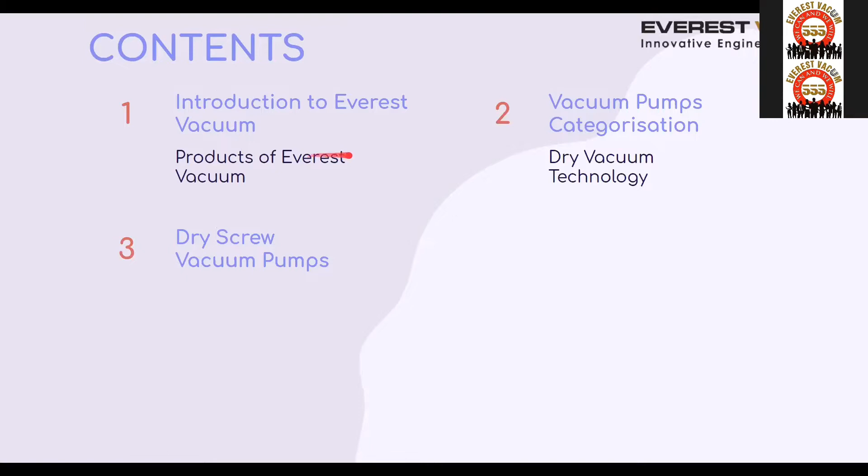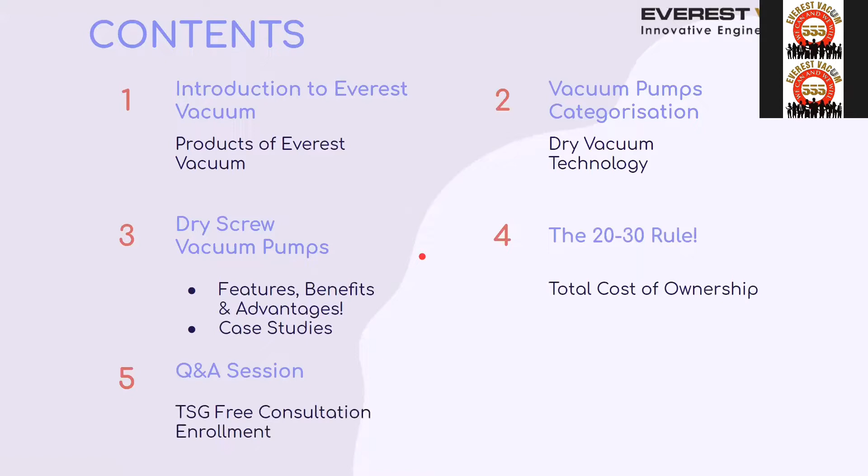Here we are today for the webinar on our vacuum product, dry screw vacuum pumping systems. Our content covers introduction to vacuum systems, our products, vacuum pump categorization, dry screw technology, dry screw vacuum pumps, their features, benefits and advantages, along with some case studies. We'll cover the 20-30 rule and total cost of ownership, and at last we will attend a question and answer round.

Everest Vacuum is a 14-year young company of Everest Group, which was started with the objective of providing turnkey solutions for the vacuum industry. Our parent company was in manufacturing of blowers and mechanical vacuum boosters for our customers. During this course, we realized that the products supplied by other companies were not meant for the vacuum system in terms of sizing and customer requirements. Customers were typically purchasing vacuum pumps and boosters from different companies, and they were facing jamming issues, sizing issues, and condensate carryover. That's why we entered this vertical of vacuum business.

This is when the management of Everest decided to work in a structured way and provide comprehensive solutions on a turnkey basis to our customers. We studied our customers' requirements and, with our three decades of experience, successfully engineered most of the products for the vacuum industry.

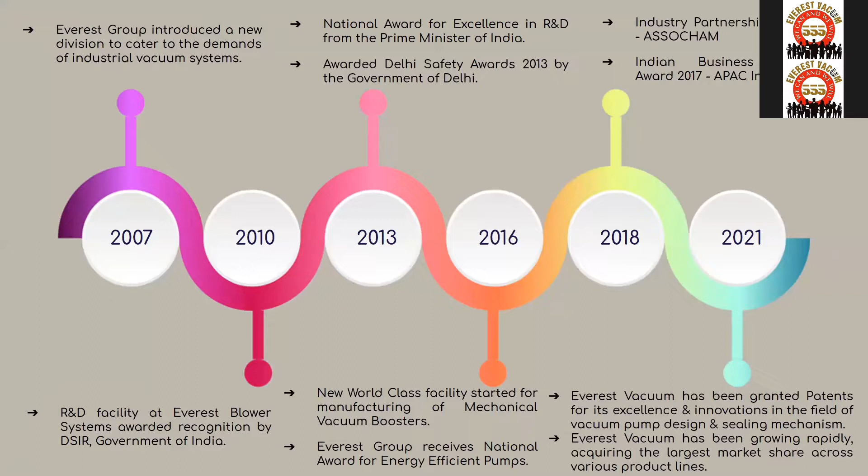We started our vacuum journey in 2007. After that, we started an R&D facility which is DSIR approved by the Government of India in 2010. In 2013, we received the award for R&D from the Prime Minister, and after that we started manufacturing vacuum boosters with a world-class facility. We were also awarded with ASSOCHAM and Indian Business Excellence Award 2017. At Everest, we are growing rapidly and have the largest market share across various vacuum products.

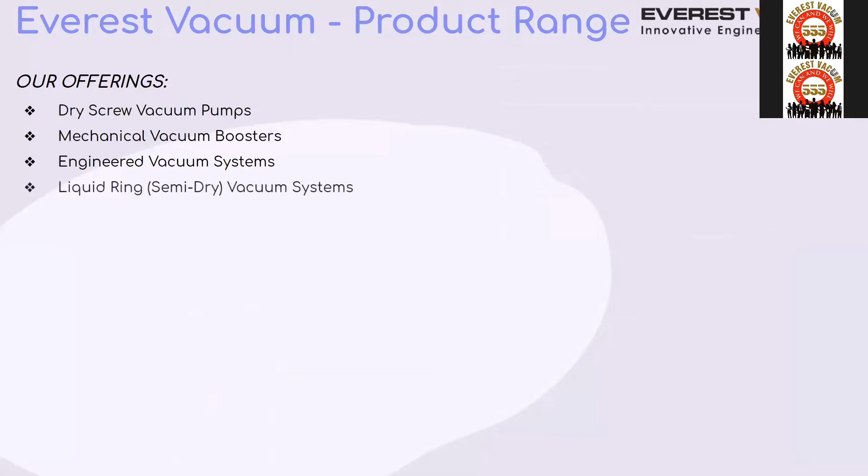Here is our product range - what are our offerings? We offer dry screw vacuum pumps, mechanical vacuum boosters, and engineered vacuum systems. We also offer liquid ring vacuum systems, oil ring vacuum systems, and rotary vane vacuum systems. This is our latest innovation, a low temperature thermal evaporator, meant for zero liquid discharge.

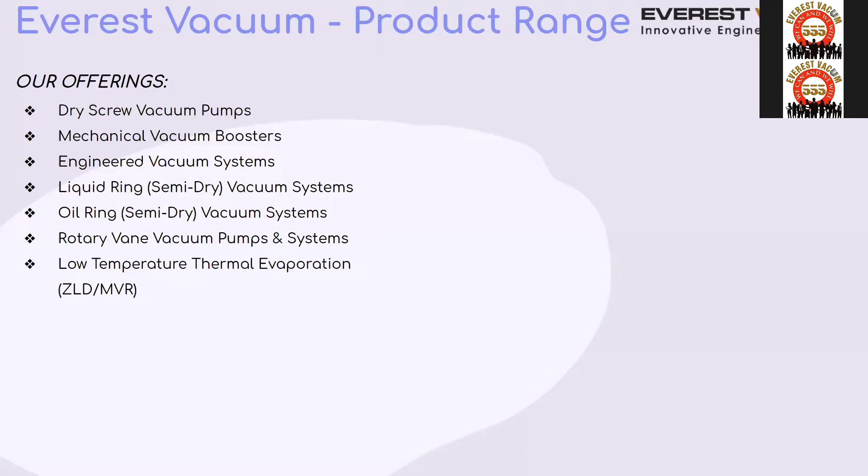What are our promises? We promise our customers clean, reliable and sustainable vacuum, improved product yield, deeper and consistent vacuum, cost and space saving by right sizing, reduced batch cycle times, and reduced operational cost.

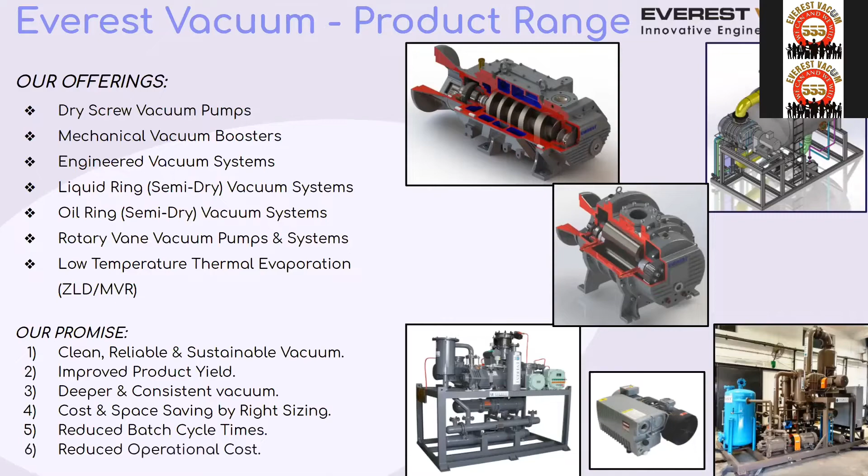Vacuum pumps are categorized into two stages. We will discuss positive displacement and rotary systems, and in rotary systems there are two technologies: wet technology and dry technology. We will discuss dry technology, the dry screw vacuum system, and we will also take wet technology as a base.

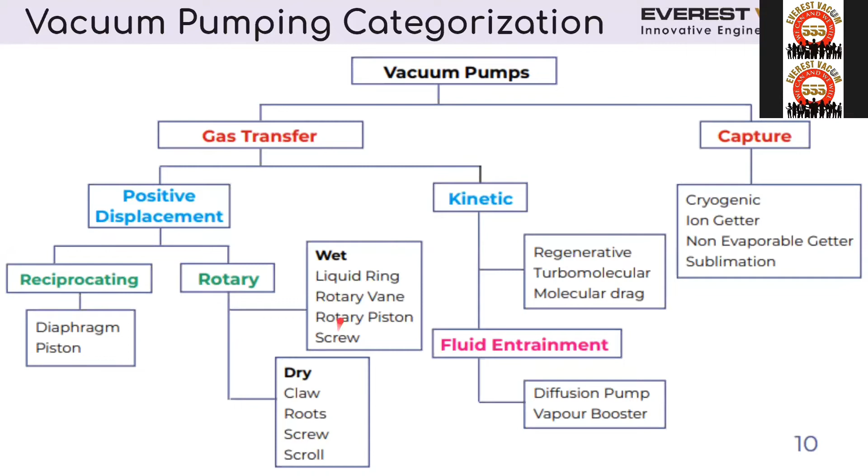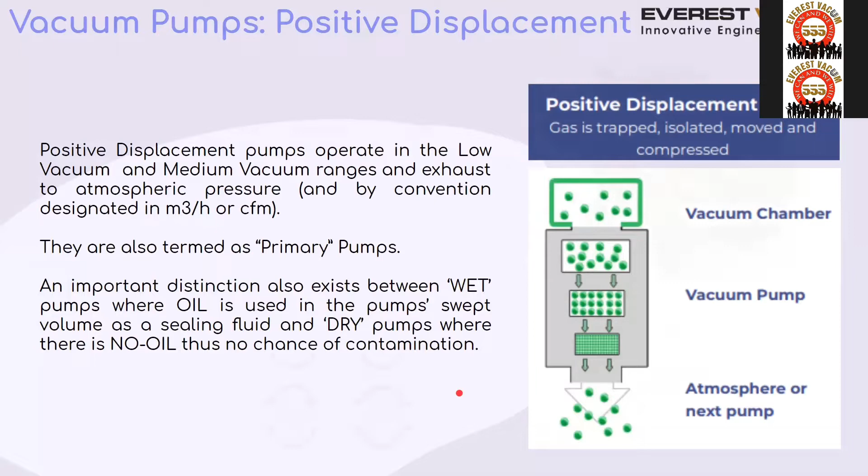Now, the mechanical vacuum booster. The mechanical vacuum booster, commonly known as booster, boosts the pumping capacity of the vacuum system and also enhances the vacuum of the backup pump. This is a twin lobe structure with up-down discharge, which supports the gravity.

The advantage of the vacuum booster is that it's 100% dry, quiet and compact. It has a very long life, provides clean pumping, has high pumping speed, power saving, and is cost effective.

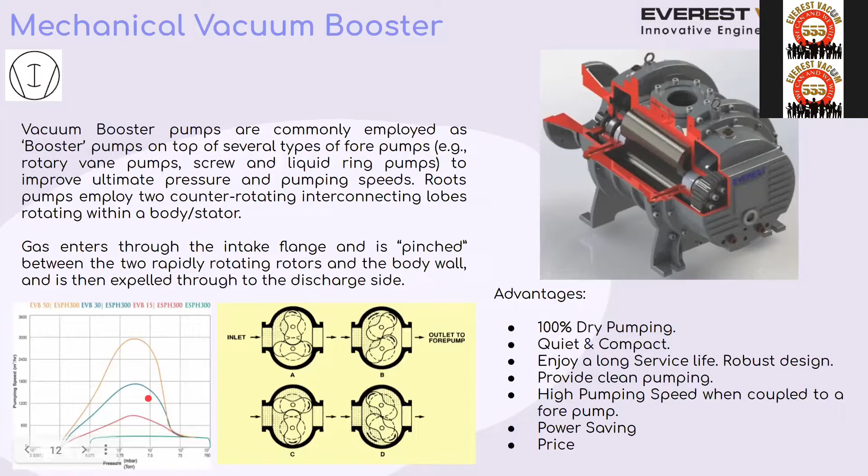When you operate only with the pump, you get consistent vacuum but with low capacity. But if you introduce the vacuum booster above the vacuum pump, then you get higher capacity with higher vacuum.

Here, dry screw vacuum pump. Dry screw vacuum pump operates using two counter-rotating rotors. It rotates opposite in direction.

This rotor traps gas between the pockets. These are the 5 pockets where the gas are trapped, and this is compressed in 5 pockets, and the screw have numerous important facets. Despite the micro space between the two rotating screws, there is no contact part involved there, so there is no need of lubrication.

As a result, there is no contamination of the medium being pumped. Furthermore, rotary wear is very minimal, and they provide you higher efficiency due to internal compression, and operational cost and maintenance requirement of these type of pumps is very low.

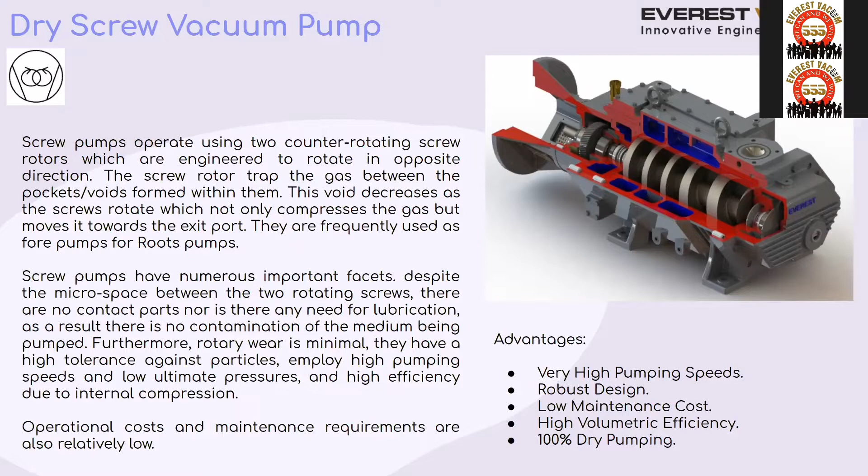Now, advantages of the vacuum pump. Dry screw vacuum pump gives you very high speed of pumping. It is robust design, requires low maintenance cost. It has high volumetric efficiency, and this is 100% dry pumping. There is no lubrication involved in the media of your product.

Now, the super screw RR model for the dry screw vacuum pumps. This is the newly developed vacuum pump technology. We offer the vacuum pumps from 150 meter cube to 1500 meter cube, and we provide the systems from 150 meter cube to 18,000 meter cube.

As these pumps are completely dry, your process vapor does not contaminate with any material, and you get clean pumping. The pumps are in line with technology available so the customer should get high volumetric efficiency with low power consumption. These pumps are operated with VFD, so you can get a reduced power of 30% saving.

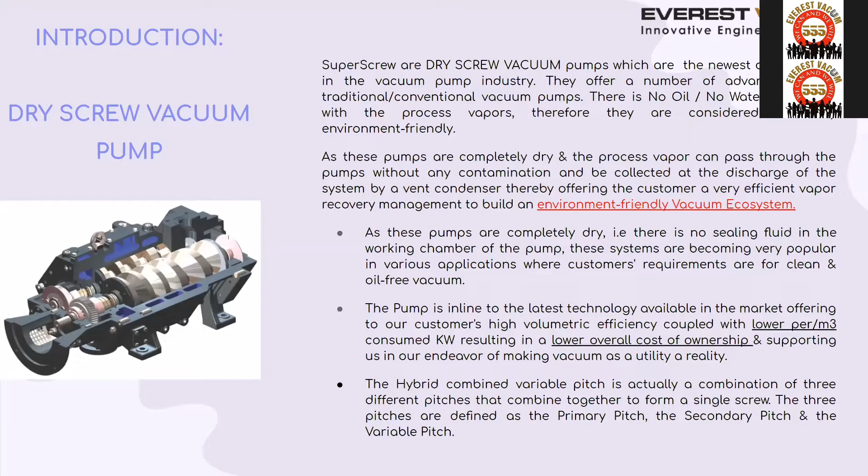Now we come to our anti-corrosive dry screw vacuum pump range. Here we provide a special coating, that is nickel plus PEEK. This is the diagram of the cut section of the dry screw vacuum pump.

Here number 1, you see the suction. Here the customer vapors come in, and this is the 5 pockets where the vapor is compressed. Number 2, this is the discharge portion. Number 3, this is the screw.

This screw is coated with nickel. This screw can be coated with nickel PEEK as per the requirement of the customer. Number 4 here, this is the seal. We provide the mechanical seal, and here there are the bearings, and here are the timing gears and shaft and coupling, and this is the cooling jacket to cool the pump.

We provide ENP coating on alloy cast iron casing. We provide ENP coating on alloy ductile iron screws. We also provide Hastelloy mechanical seal Kalrez O-rings. We provide PTFE double lip seal. We provide synthetic lubrication oil for the bearing lubrication purpose. We provide N2 inlet and seal purge.

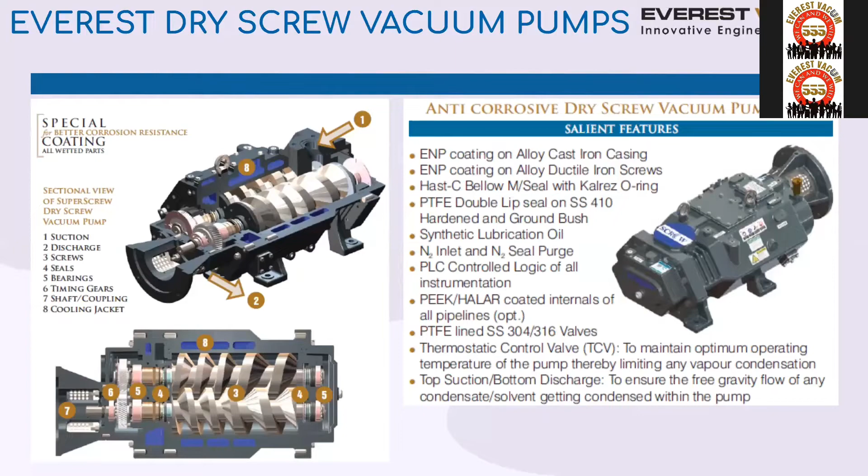These are our offerings in the dry screw. We give PEEK coating for standard, non-corrosive applications. We provide our CX pumps, anti-corrosive pumps for corrosive vapors, and we provide clean pumps without mechanical seal where we have to suck only air and clean vapors.

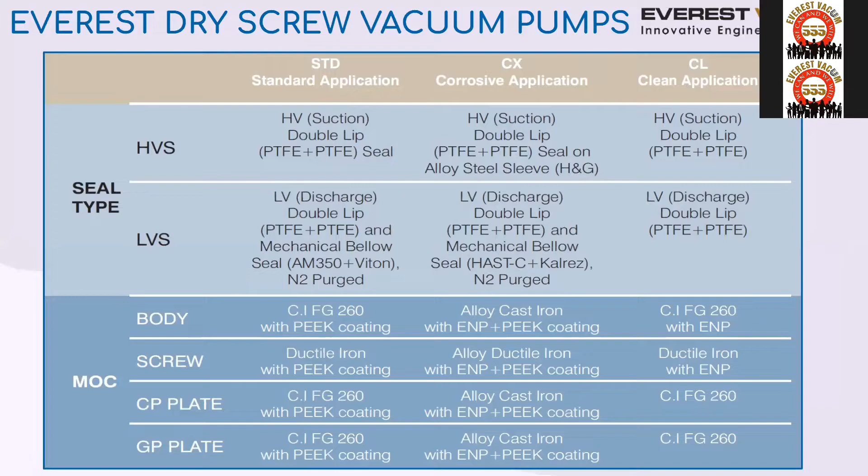This is the performance of the last 10 years, how this industry evolved. Actually, dry screw vacuum pump previously 300 meter cube came with a 15 HP motor, and there was PTFE coating and PFA coating. After the experience, we got the PEEK coating, which is vibrant.

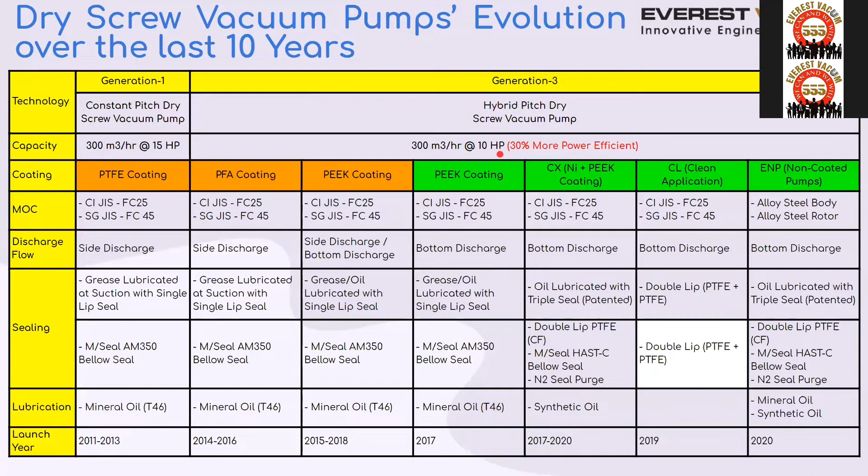And we are now offering our CX pump, clean pump, and ENP, that is our new invention, non-coated pumps. We got the power efficiency award because we have reduced the power almost 33%. By now we are giving 300 meter cube per hour pump with a 10 HP motor.

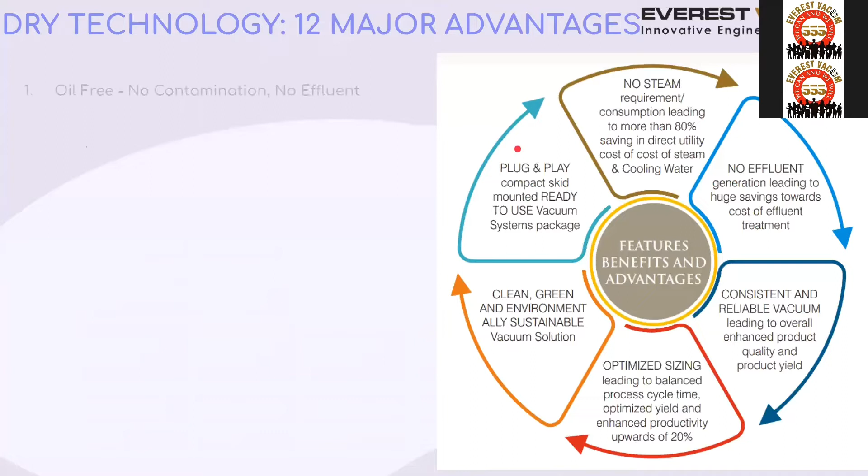Why to switch to the dry screw technology? Here in dry screw technology, this is oil free. There is no oil in the media, no contamination, no effluent generation, no contact operation, so no wear. For solvent recovery, we can introduce a condenser at the post of the vacuum pump so that we can get solvent recovery also, that leads to generate revenue.

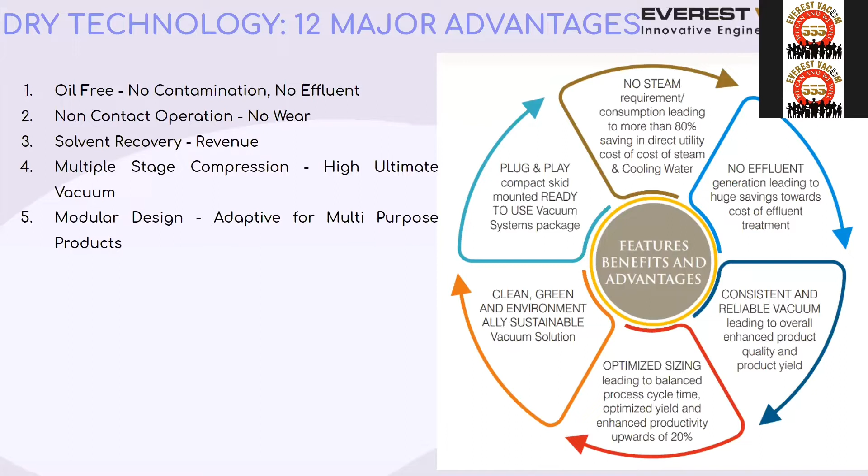Multiple stage compression, high ultimate vacuum. Modular design, so it can be adapted for multi-purpose product. Compact design, less space required. Liquid compatibility is very

versatile, meaning it can handle various vapors. Low vibration and noise, no foundation and enclosure required. This is a wide operation range, so one pump system can handle most of the range of the product. This is a proven technology, so no risk. And this is high efficiency, low operating expenses, and easy maintenance, so it leads to low cost of ownership.

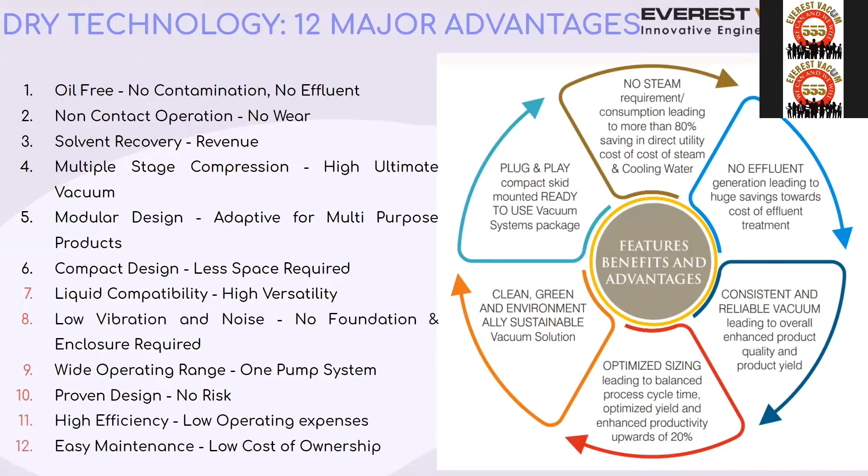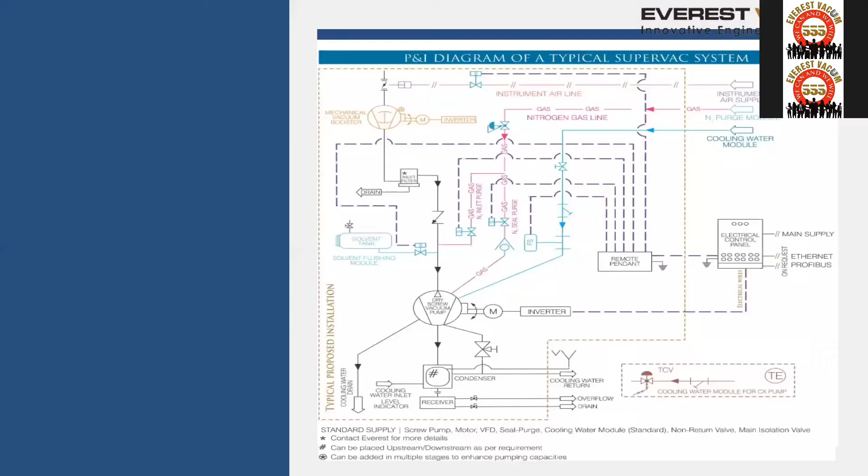This is the typical P&I diagram of a vacuum pumping system. This is the dry vacuum pump, and this is the uppermost mechanical vacuum booster. Here in between, a filter is incorporated if required, and this is the post condenser at the discharge with the receiver, so that we can get the recovery. These are the gas purging line, and this is the cooling water line.

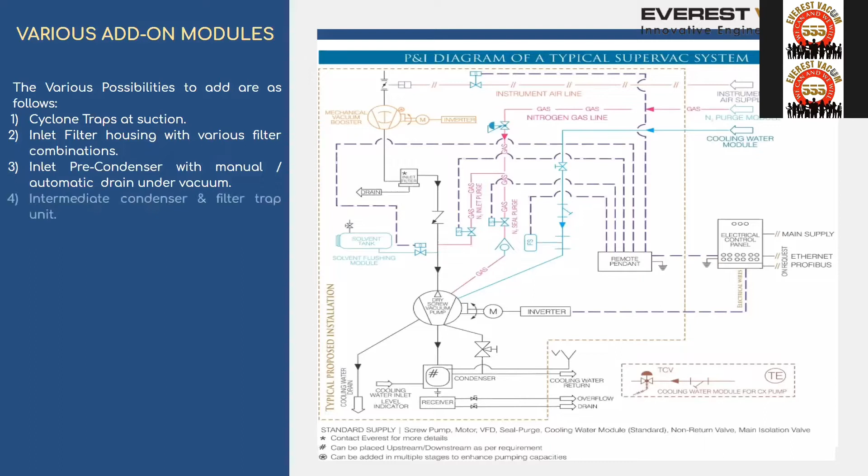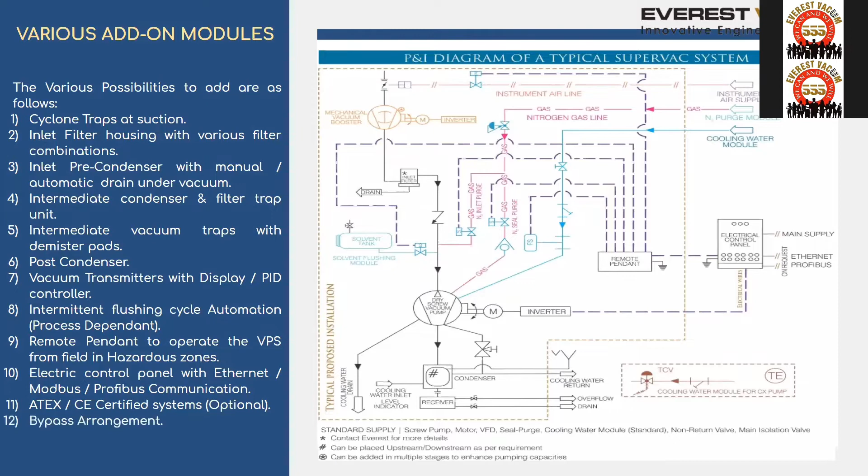Now we talk about what we are giving as add-ons on this vacuum system. We can provide cyclone traps at the suction with the customer requirement. We can provide inlet filters. We can provide pre-condensers and post-condensers. We can provide vacuum transmitter and PID controller. We are providing intermittent flushing for the automatic flushing. We give the remote pendant electric control panel that can be connected through Ethernet, Modbus or Profibus communication. This is the ATEX or CE certified system, and we give the bypass arrangement also to bypass the booster.

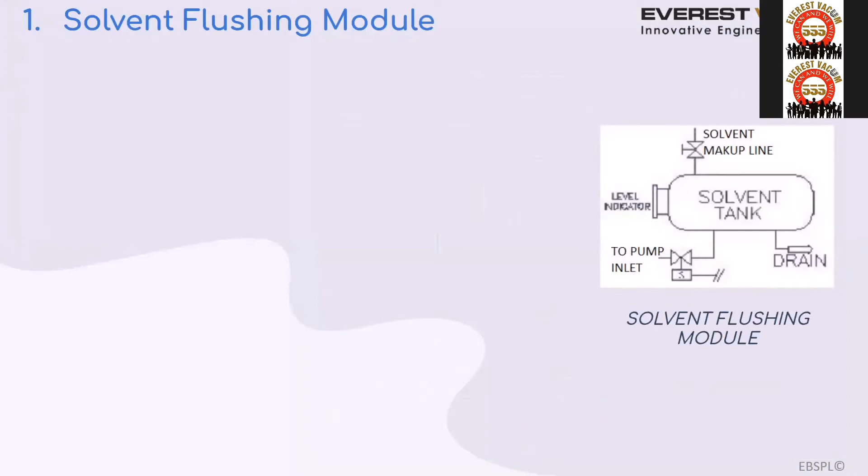Now, this is the solvent tank module. Here, solvent tank module is very important because solvent flushing is required because of the solvent vapors which condense in the pump. This is the solvent tank. It is connected with the solvent makeup line. We provide a level indicator, so it indicates if the solvent is low.

This solvent flushing is recommended to be implemented with the inlet purge for the most effectiveness. Selection of proper flushing is most important, meaning whatever solvent we take here will be miscible with your carryover vapor. A correct installation of a solvent flushing module can enhance pump life. Solvent flushing module is connected to the shutdown cycle.

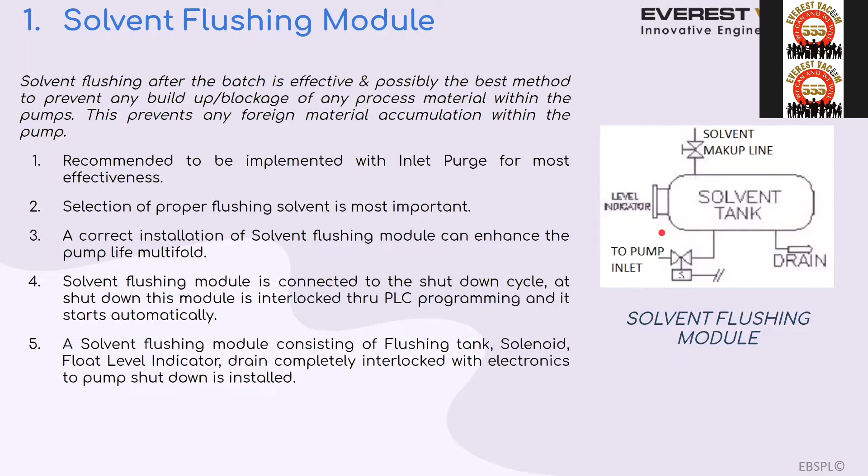At shutdown cycle, this module is interlocked through PLC programming, and it starts automatically. There is no need to start manually. A solvent flushing module consists of this solvent tank, solenoid valve, float level switch, that drains completely interlocked with electronics to pump shutdown as installed. Done right, it has some of the most promising results.

Now, N2 seal purge. Gas seal purge sustains positive pressure during operations over the mechanical seal and thus protects it from process contamination material. Actually, this seal purge continues with the process so that the seal does not get damaged with your vapors. So seal purge module consists of a pressure regulating valve, non-return valve, and a solenoid valve which is interlocked to the programmed logic controller on board for automatic operation.

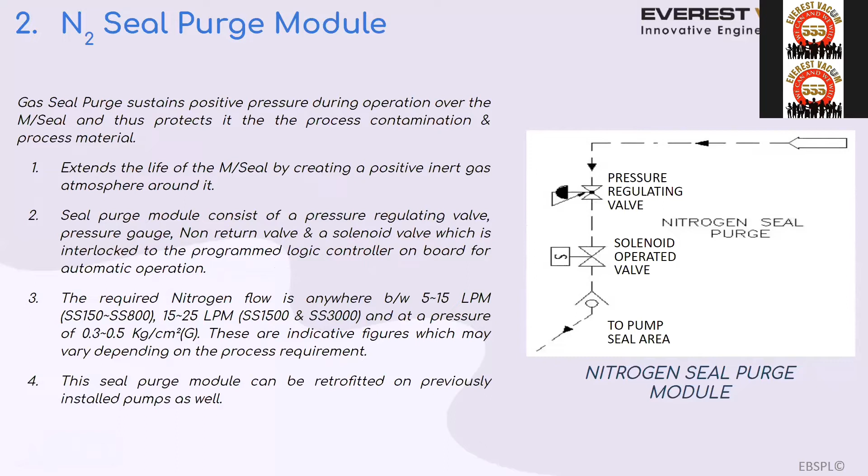The nitrogen flow required here is 5 to 15 LPM. This seal purge module can be retrofitted on previously installed pumps as well. Seal purge is very efficient in highly corrosive environments.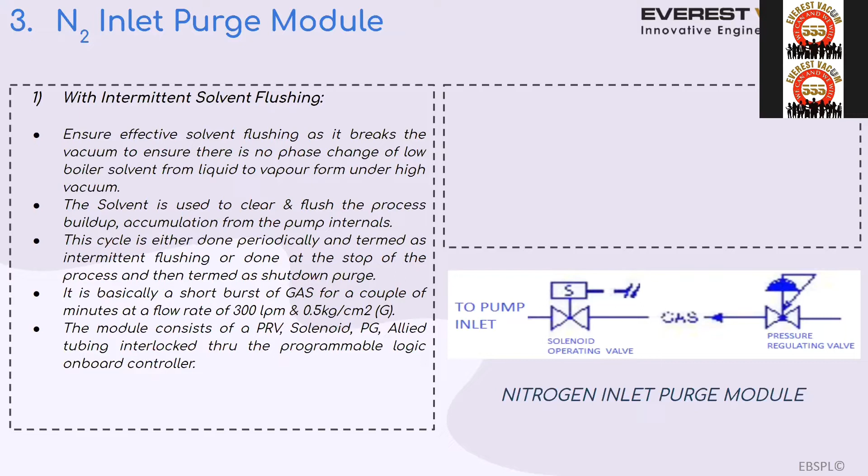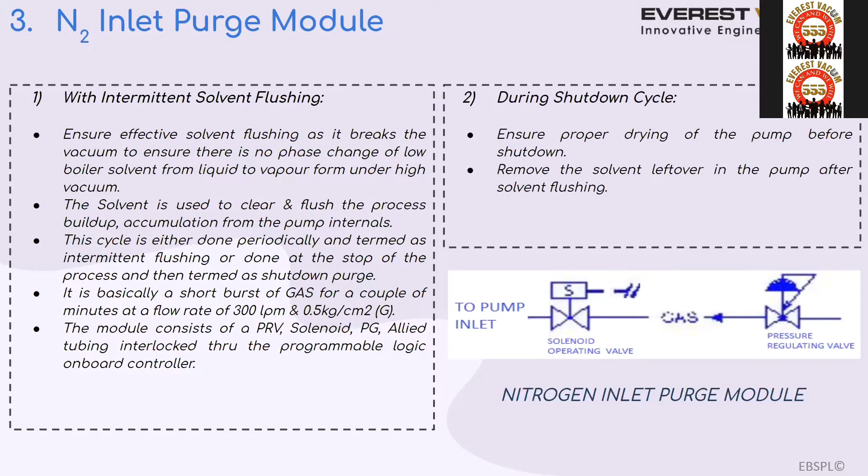During shutdown cycle, ensure proper drying of the pump before shutdown. Remove the solvent left over in the pump after solvent flushing.

Now we come to the gas ballast module. This is the gas ballast module. Actually, some of the vapor has a tendency to condense. In such case, air, nitrogen or process gas can be used as an input for the gas ballast, as the process requires to overcompress the vapor at the point wherein condensation is just about to take place so that it increases the temperature and ensures the vapor does not convert into liquid.

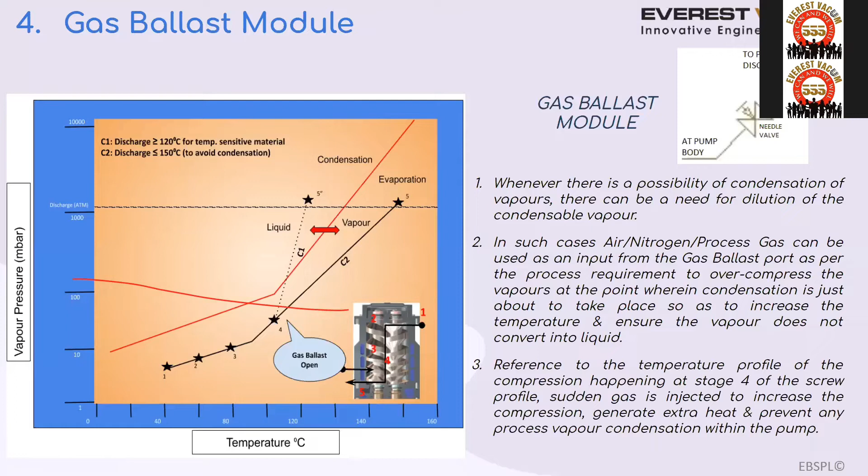Reference to the temperature profile of the compression happening at stage 4 of the screw profile. Sudden gas is injected to increase the compression, which generates extra heat and prevents process vapor condensation in the pump.

Here at Everest, we believe that with the right sizing of the pump, we can reduce operational cost by 20% and increase productivity by 30%.

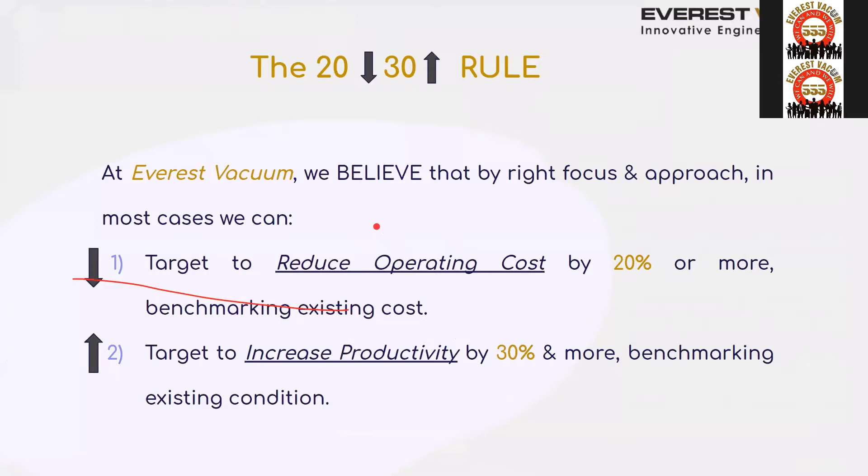Here are some case studies of wet system versus dry screw vacuum system. In the old vacuum system, we considered a 4-stage steam jet ejector with 2 interstage condensers, backed up by a water ring pump. The problem with the old system was excessive effluent generation, high cost of treatment of water discharge, and mixing of solvents with the steam and water leading to effluent generation. Also, vacuum fluctuation was a very big problem in the steam jet ejector system.

Some other issues: choking of steam jet nozzles with product residue, desired vacuum not achieved, desired product quality not achieved, and desired product yield not achieved. This led to high process cycle time and the nuisance of pollution approvals and certifications. With this dry screw vacuum technology, we replaced the 4-stage steam ejector with our SuperVac 10400.

This is 100% mechanical pumping with instantaneous start-stop. The solution for effluent generation is that this is dry pumping, so there is zero direct effluent generation, zero cost of water treatment, and no direct utility contamination.

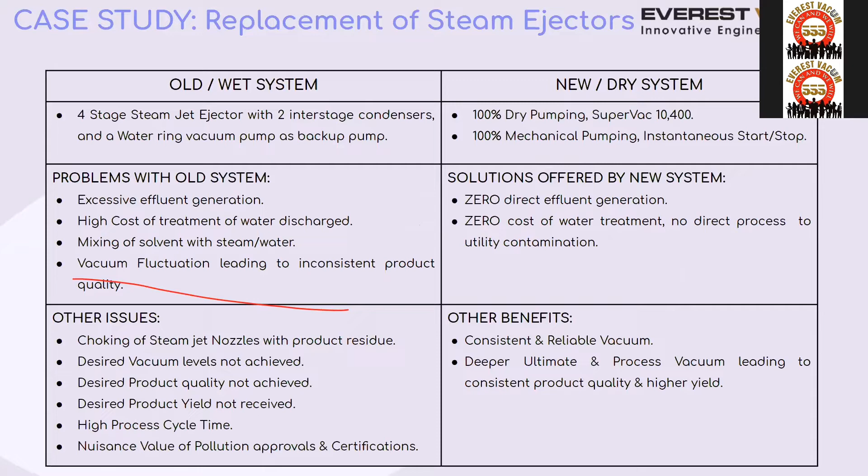Other benefits are that it provides consistent and reliable vacuum, and deeper ultimate process vacuum, leading to consistent product quality and higher yield. This is the value addition by our team, the TSG team.

During the course of commissioning and trials, Everest also faced problems like choking of the pumps, which were getting mixed with the vapors. This problem was flagged to our Everest technical team, and we gave some solutions and modifications. Now the systems have been running trouble-free for more than 2 years.

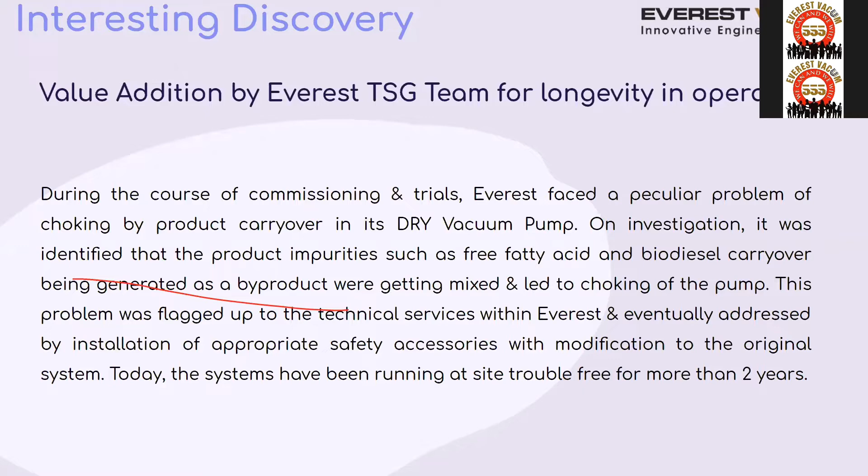Here are some case studies of different companies. One case study is of Matrix Fine Science Limited, where the process is alpha tocopherol and biodiesel distillation. We provided a pumping system of 10,400 meter cube per hour.

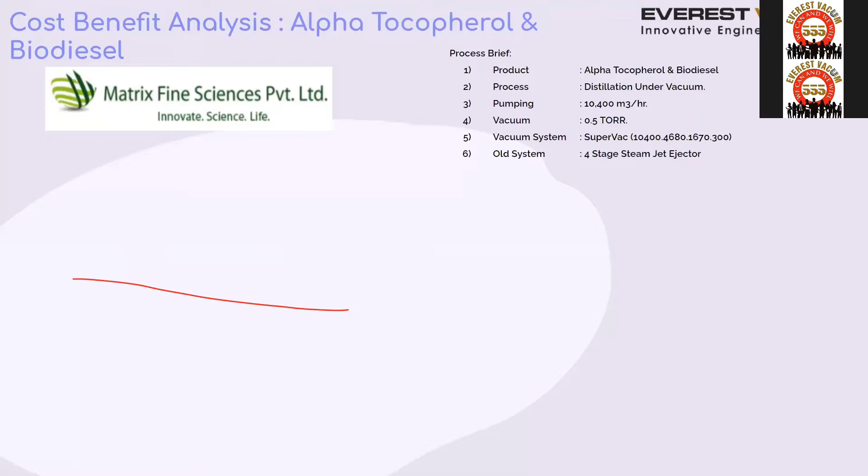The vacuum requirement in this process is 0.5 torr, and we replaced the 4-stage steam ejector system. The power cost, basically the steam cost, of the wet system for 1 year was around 36 lakhs. Nowadays the steam cost is about 1.5 to 2.5 rupees per kg, and in dry pumping the power cost is 14 lakhs 28,000 rupees.

There is also a utility cost related to solvent recovery. In the steam jet ejector system there is no post condenser and no dry technology, but in the dry screw vacuum pump we provided a post condenser, so we get solvent recovery, and this recovery generates revenue.

In our system there is an expense for nitrogen and air as utilities, but this cost is very minimal, and the maintenance cost of this pump is almost similar. But overall, you get the benefit of approximately 30 lakhs savings.

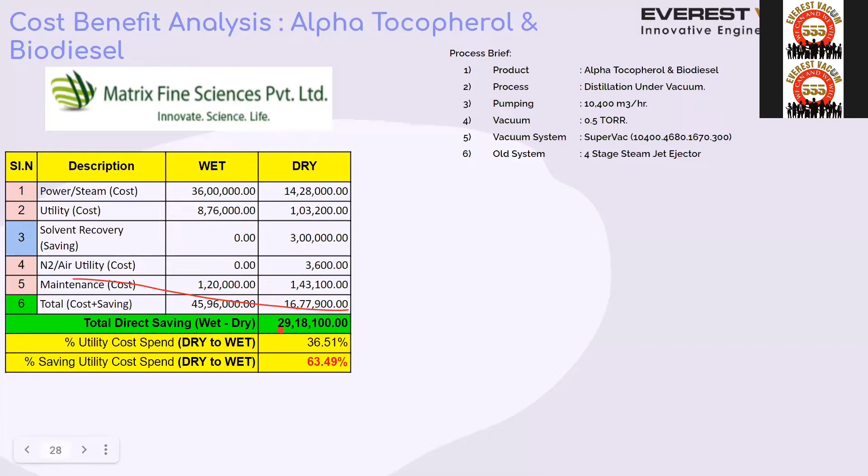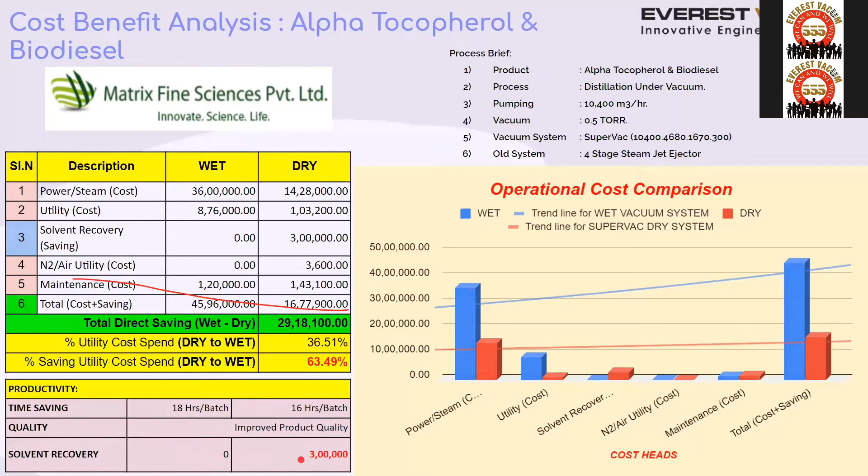This is the case study of GFL. Here the product is monochlorobenzene and sulfolene. This is a distillation process under vacuum. We provided a pumping capacity of 1000 meter cube per hour system.

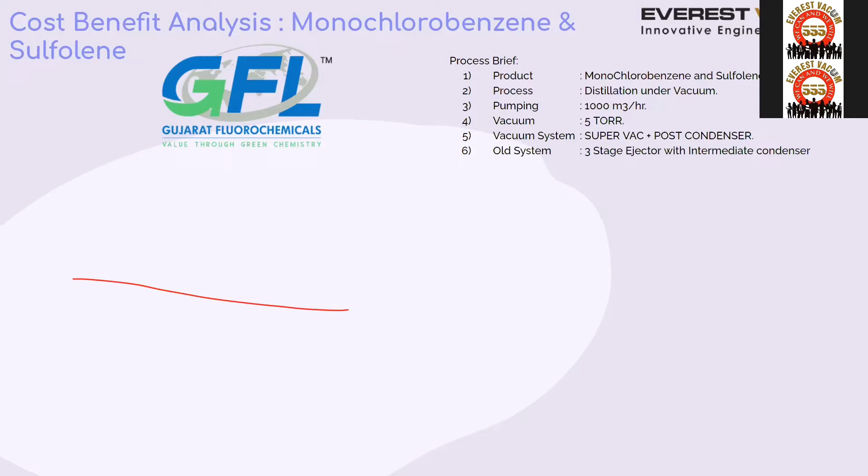The vacuum requirement is 5 torr. We provided our SuperVac 1000 with a post condenser, and we replaced a 3-stage steam ejector system with intermediate condensers. Here you see the steam cost is very much higher, while our power cost is much lower.

Utility cost and solvent recovery here are very high because of the price of the solvent—the higher the price of the solvent, the higher the revenue and solvent recovery you get. In our pump there is a utility cost of nitrogen and air, and the maintenance is similar, but here you see a saving of approximately 20 lakhs.

And today the market is very competitive, so we have to focus on the low cost production theory.

Productivity, here we talk about productivity. With the wet system, the batch time was 22 hours, which reduced to 18 hours. And the quality of the product is also improved by 0.5%. The solvent recovery is the most important part of dry screw vacuum technology.

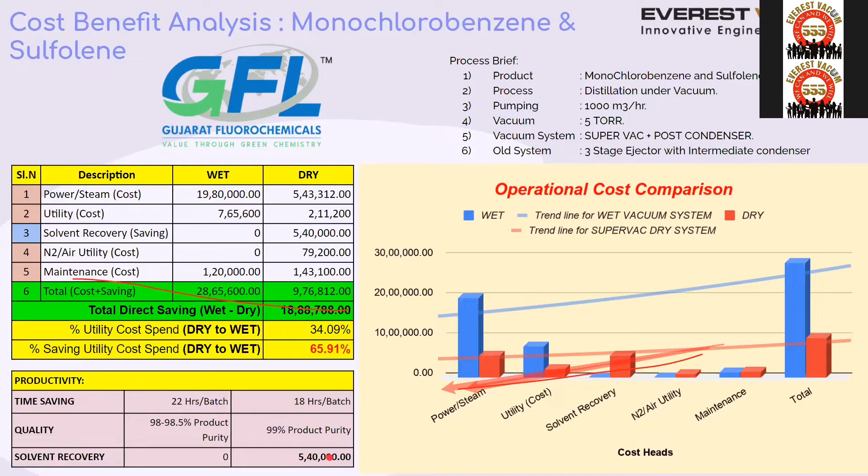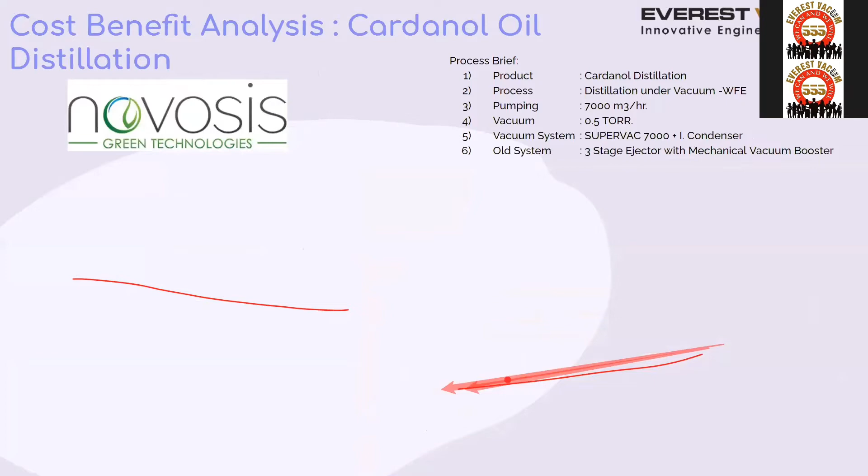This is the case study of Novosis Green. Here the process is cardanol distillation, and it is distillation under WFE. The system we have given was of 7000 meter cube per hour, and the vacuum requirement here is 0.5 torr.

Here you see a similar concept. The steam jet ejector systems consume steam, which is very costly, so the operational cost is very high. Steam jet ejectors are low cost, but the operational cost is very high. Here the customer gets a recovery of 3,60,000 rupees, and the maintenance is the same, and the total cost saving here is approximately 23 lakhs.

And here there was also time saving. Previously the customer was only processing 11 ton per day. Now with the dry screw vacuum system they are processing 13 ton per day. It is 18% more efficient, and the yield was previously 60%. Now with the efficient and proper vacuum, the yield is coming to 63 to 65%.

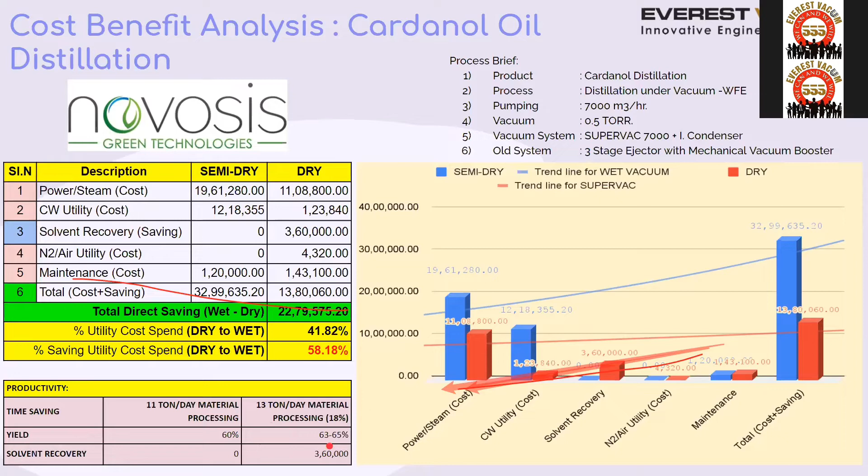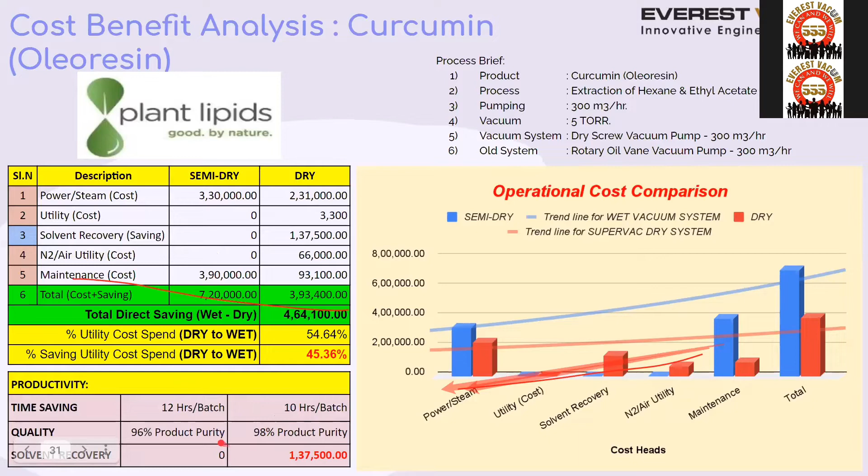Here is a case study of plant lipid, where the process material was oleoresin. It is an extraction process, and we have given a vacuum pump of 300 meter cube per hour. The process requirement was 5 torr. Here the cost of the steam was 3 lakhs, and our power was 2 lakhs 31,000. This is a small pump, 300 meter cube pump, and on that small pump chain we get 5 lakhs savings. Here we got 2 hour saving on the batch process, and the most important thing is that the quality of the material increased from 96% to 98%.

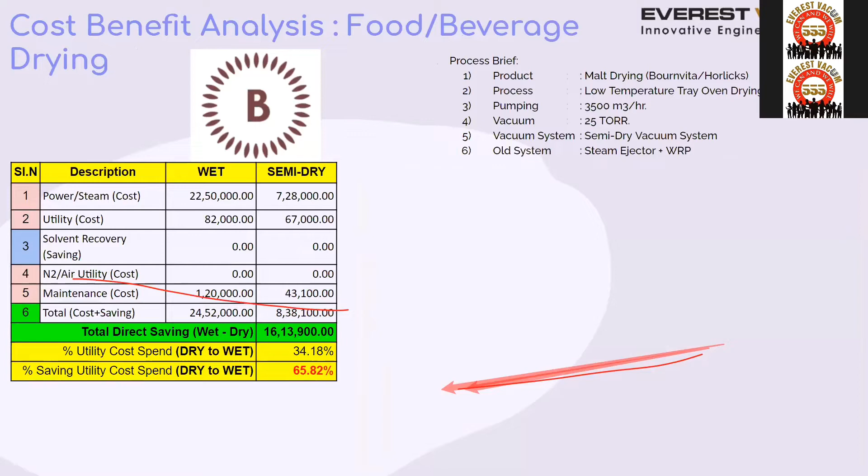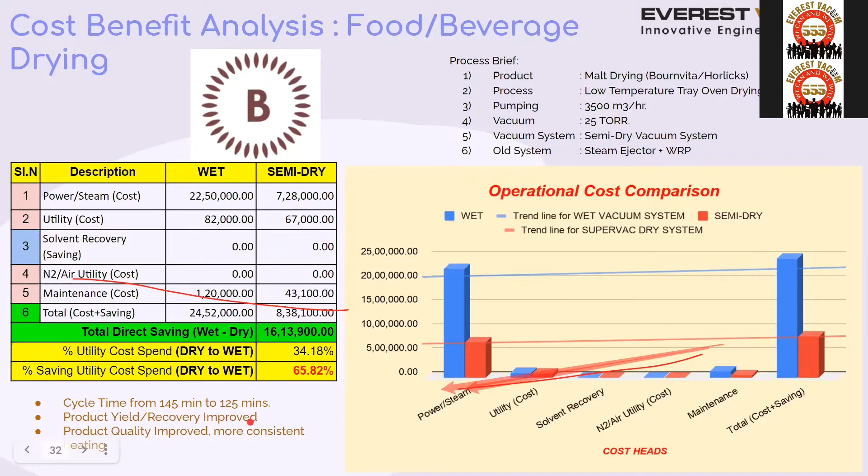This is the case study of Bournvita drying. We have supplied abroad also for the Bournvita, Horlicks type drying, and in India also. We have given a 3500 meter cube per hour system, in which they require 25 torr. Here the steam cost is very high, 22 lakhs they are consuming in steam, and we are at 7.28 for the power consumption. The solvent recovery is nothing because this is malt drying, and we get only water from the drying of Bournvita and Horlicks, so there is no addition of solvent recovery, but still we managed to get 16 lakhs saving, and the batch cycle is reduced by 20 minutes, and the product yield and quality also improved.

The TGV group. In TGV group, they have taken the vacuum system for glycerin recovery, and they have taken a very big system of 18,000 meter cube per hour, with a requirement of 2 torr. Here the steam cost was pretty much high, 45 lakhs, and in comparison, our power consumption was very low, meaning 5 to 6 times lower. So here the saving is coming to approximately 45 lakhs.

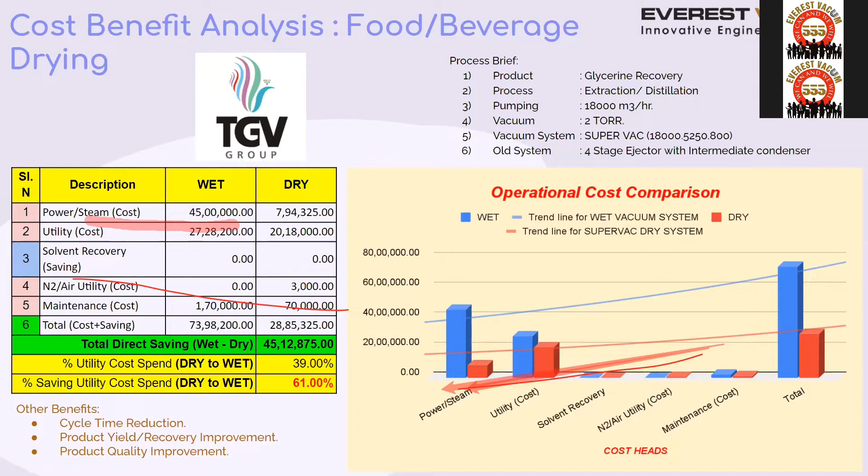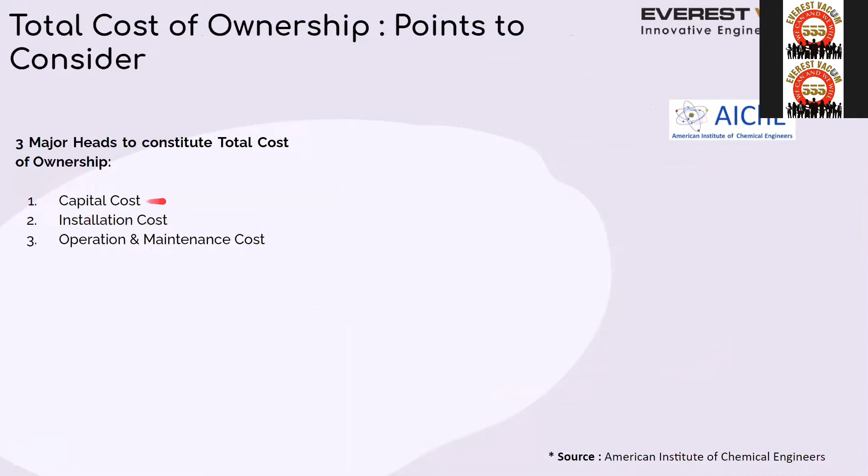And the benefit of the dry screw is cycle time reduction. We get a good quality product. Here comes total cost of ownership, which we have considered as capital cost, installation cost, and operation and maintenance cost. Actually, capital cost of a dry screw vacuum pump is not high. Installation cost is very low, and the operation and maintenance cost also has no much wear and tear.

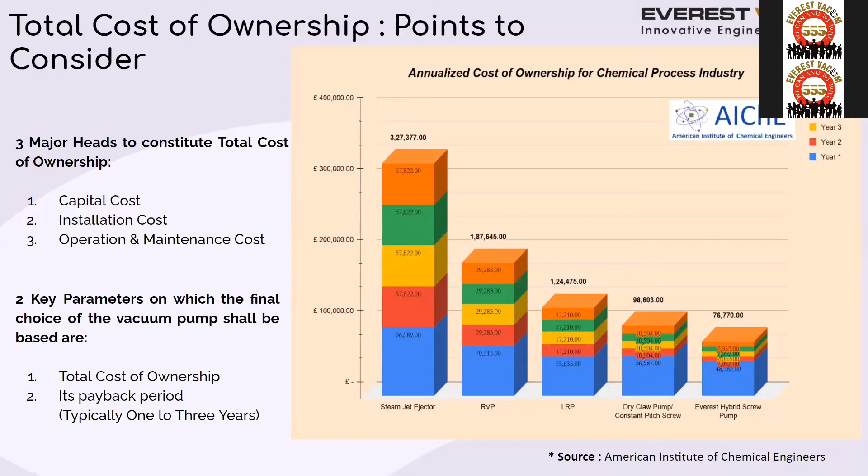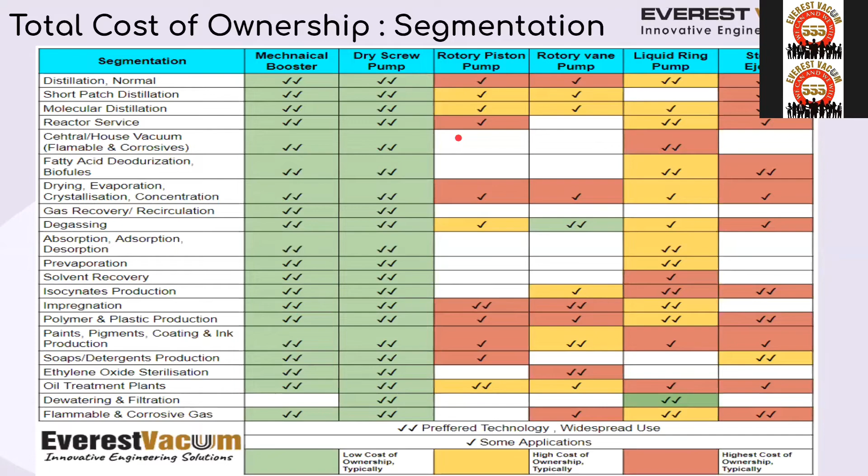Now we see these are the segments where the vacuum pumps are used. In most of the cases, all of the cases, dry screw pumping system and mechanical vacuum system are compatible. But rotary piston pump, rotary vane pump, liquid ring pump, and steam jet ejector are not suitable for all of the categories. So we said this dry screw vacuum pumping system can be used anywhere with any solvent.

Now we come to a conclusion of wet versus dry. Dry vacuum pumps are getting established as an efficient and reliable alternate to wet pumps for the demands of the chemical process industry. They are becoming a popular choice, being used to pump some of the most aggressive and problematic gases and vapors.

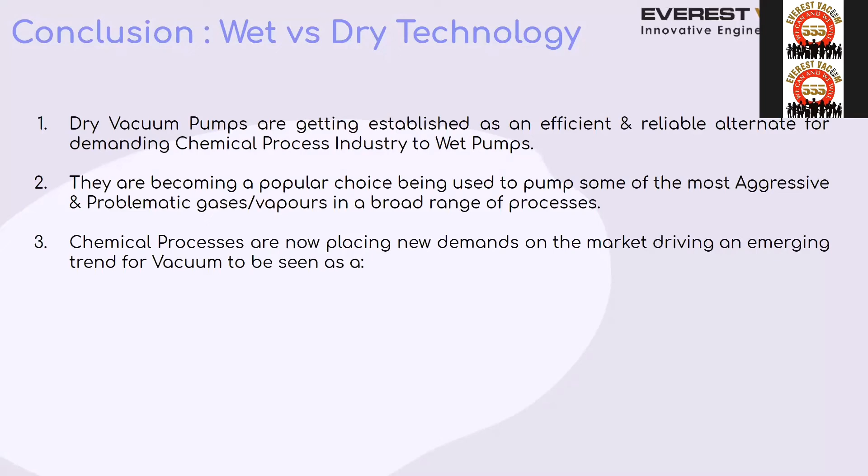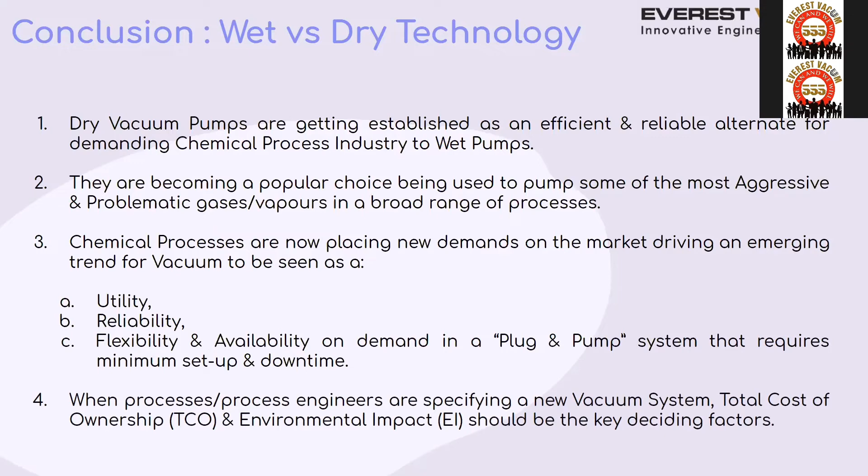in a broad range of processes. Chemical processes are now placing new demands on the market, driving an emerging trend toward vacuum utility, reliability, and availability. This is a vacuum system which is plug and pump. When process engineers are selecting a new vacuum system, total cost of ownership and environmental impact should be the key deciding factors.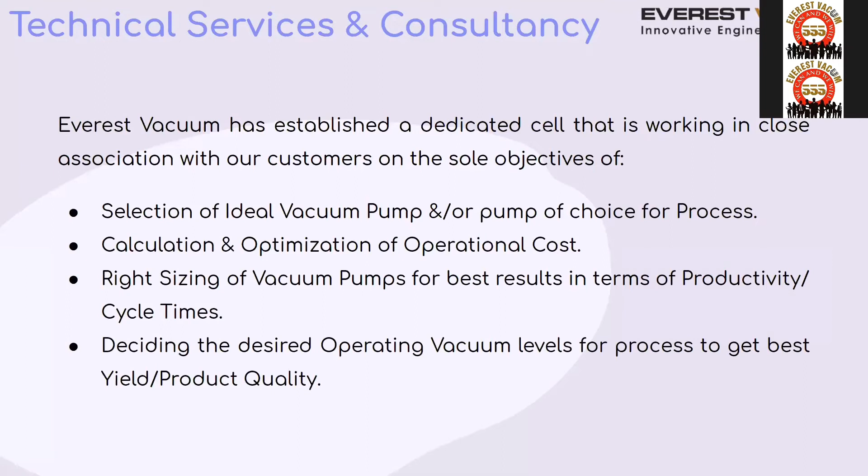Everest Vacuum has established a dedicated cell that works in association with the customer on a sole object basis. We do selection of the ideal vacuum pump for the process. We calculate and optimize the operational cost, right-sizing of the vacuum pump for the best result and productivity, deciding the desired operating vacuum level for the process to get the best yield and product quality.

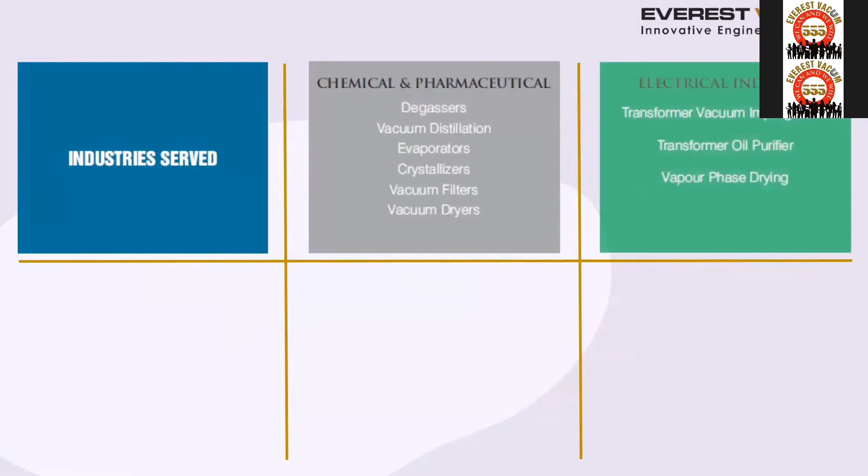These are the industries served by us: chemical and pharmaceuticals, electrical industries, vacuum furnace industry, industrial processing, and food industry.

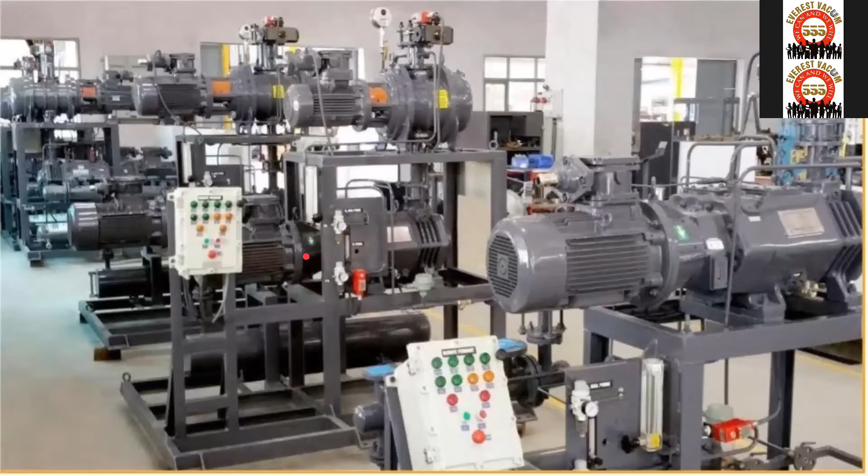These are the photographs of our vacuum system. This is the vacuum pump and this is the booster. This is the FLP panel, meaning this is a plug and play system. You don't need to take a wire and get a safe area for the panel. This is the plug and play system.

This is our engineered system, and this is the customized system as per customer requirement. We have our manufacturing facility at Bahadurgarh, and our head office at New Delhi. We have regional offices in Hyderabad, Visakhapatnam, and Vadodara.